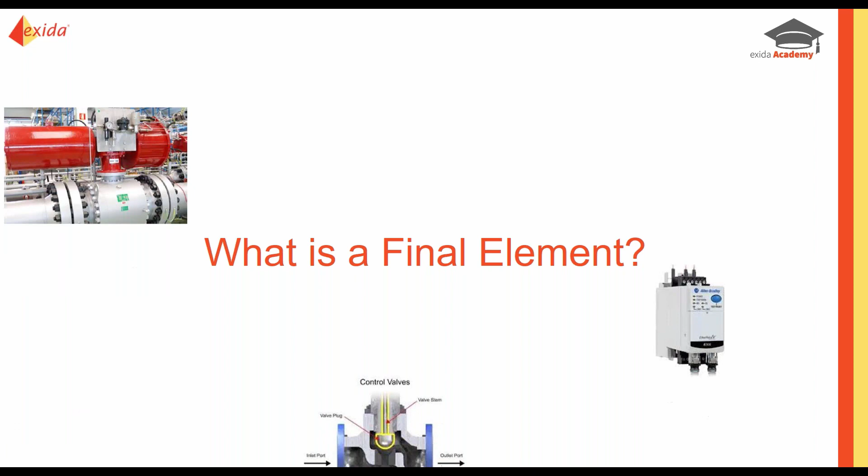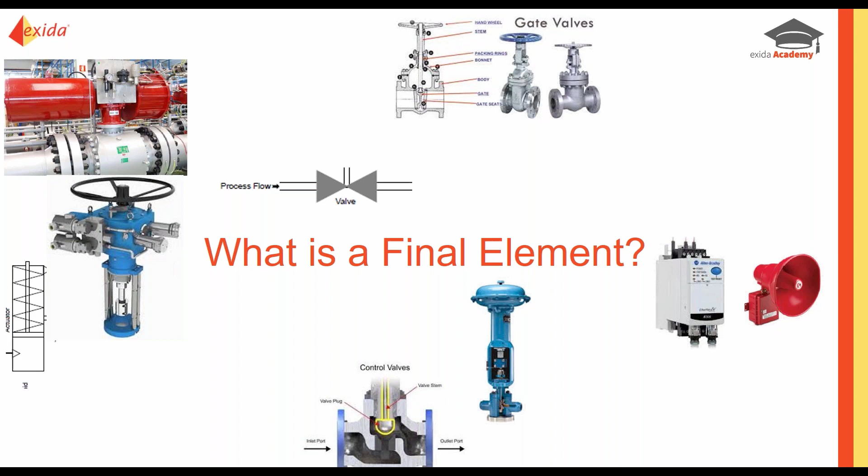Final elements can be many, many different types of devices. The final elements that we're going to be concentrating on are devices that can be used in safety systems. These can include annunciation devices such as horns, flashing lights, or sirens, any sort of functions designed to alert somebody to have a consequence reduction. So somebody is alerted, the sirens are going off, the horns are going off, and you're going to reduce the consequences of an accident.

Some safety instrumented functions, or SIFs, which I'm going to be calling them throughout the presentation, can be simple, actually only comprising of one device.

You might have a relay, a motor contactor, or a solenoid valve, and you can use just that alone as your final element. Or you could have a more complex SIF, like a machine control application where the final element may be your motor controller, or a device as complex as a clutch or brake assembly, which requires removing kinetic energy for your SIF. So when I first thought about functional safety and final elements, I was just thinking of the valve alone, that last piece. But final elements encompass so much more than that.

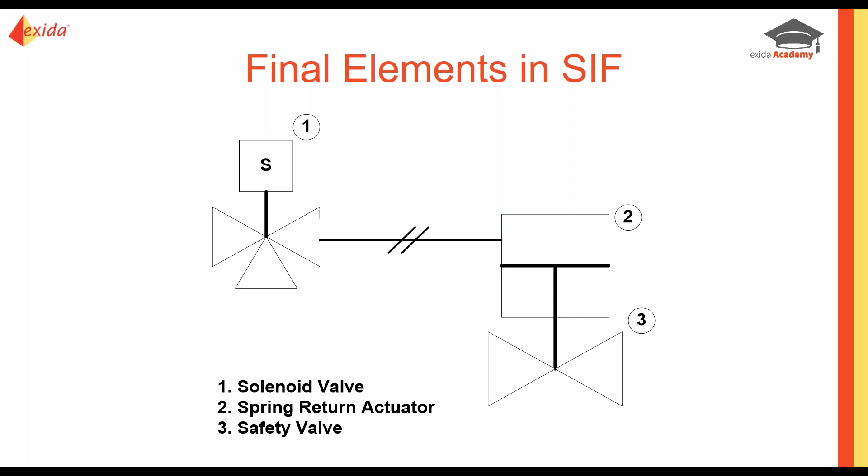So as you can see, our example of a SIF, just our solenoid actuator valve, is relatively simple, but let's take that idea and build upon it in this webinar.

The different devices that can go into the SIF depend on how complex you are. We're going to look at four main device categories, starting with your final element interface devices. Three of the main categories are a solenoid valve, a quick exhaust valve, or a volume booster. But there are other things like filters, flow controls, restrictors, silencers, regulators - all of those are also included in your final element interface device category.

Probably the most frequently employed device for controlling safety valves is a solenoid. Solenoid valves are available with various porting configurations. You can have a very simple poppet design, a 3-way solenoid, to a 5-way and beyond. So even solenoid valves themselves vary in complexity.

A solenoid valve, in its simplest implementation, utilizes a change in an electrical signal to control the flow of the fluid or your process flow. Solenoid valves contain a coil which generates a magnetic field when energized, and that field acts on a magnetic core piece inside the solenoid, causing it to move. It can either cause an opening or a closing. In a direct acting configuration, the movement of the core will either completely open the fluid flow or close it.

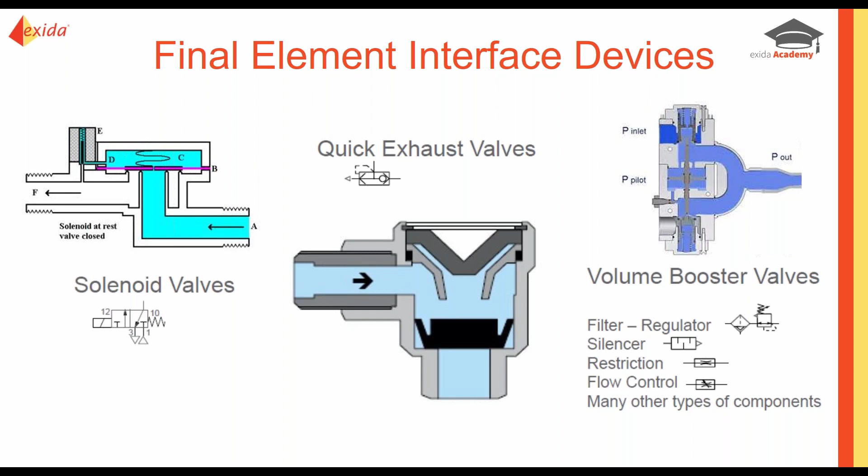The next category of devices that can be considered a final element are motor controllers or starters. A motor controller is a device or group of devices that serves to govern, in some predetermined manner, the performance of an electric motor. A motor controller might include a manual or automatic means for starting and stopping that motor.

This includes selecting forward or reverse rotation, regulating speed, regulating or limiting torque, and also protecting against any faults or overloads. There are three main types of starters: your direct on line, your star delta starter, and your auto transformer starter.

Many motor controllers can be manually, remotely, or automatically operated. They may include some means for starting or stopping the motor, which may include other functions or just that function alone. An electric motor controller can be classified by the type of motor it drives, such as alternating current or permanent magnet.

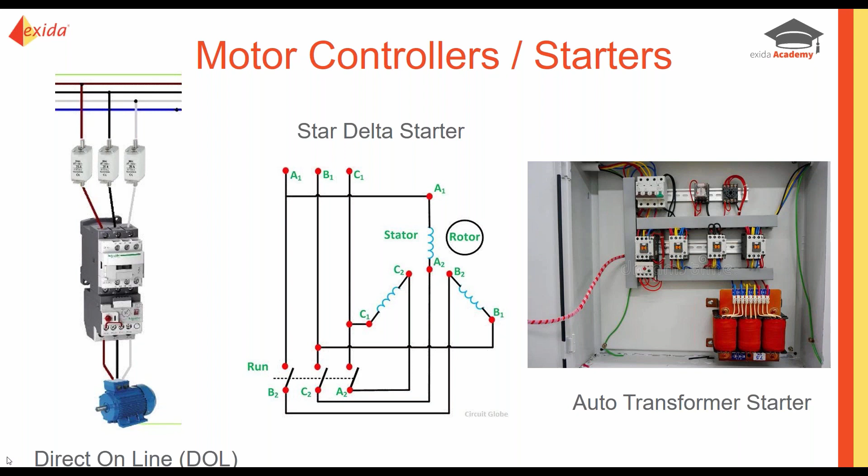The next type of device we're going to look at is an actuator. If you think of it in the simplest terms possible, an actuator is a mover, and it's a component or device in your SIF that is responsible for moving and controlling your main or end piece of your final element, usually being a valve.

There are many different types of actuators. I've listed 5 of the more common types: your diaphragm, your piston, rack and pinion, your Scotch yoke, or your motor-driven actuators. And there's always going to be subclasses of these actuators, such as spring return or dual acting.

But they will be classified on their main action, such as your rack and pinion will have more gears, more teeth, where your Scotch yoke is going to be that same linear to rotary action, but by means of a lever arrangement instead.

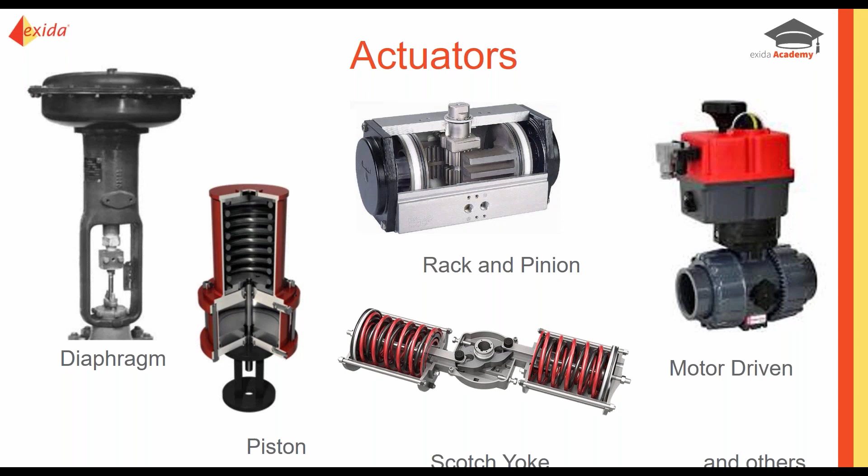One thing to take into consideration when you are considering your actuator, you need to also consider your power source. Is it electric? Is it air? What if that power source is lost? Can your valve still close or open if it needs to? Do you need to have a backup power source?

The final category of final elements that we're going to discuss today are valves. And once again, just like actuators, there's many different types of valves. I listed a couple of the more common. You might have heard of a ball valve or a gate valve, a plug or a butterfly or a globe, but there's many different types of valves out there.

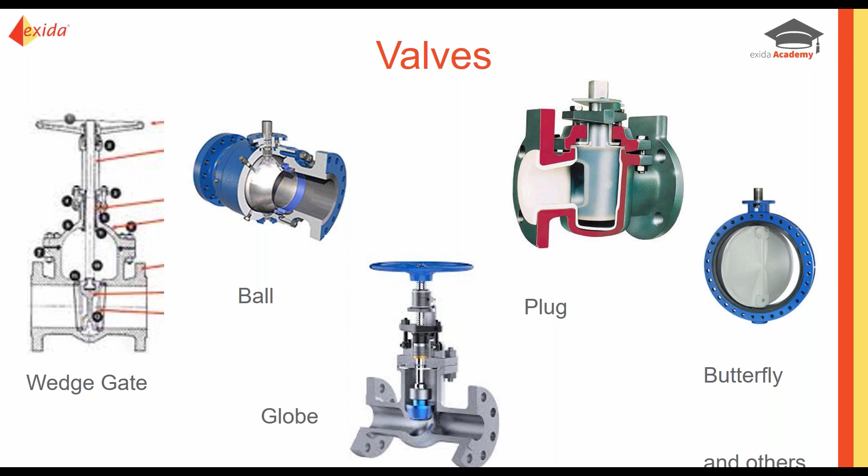Both of these can be used in safety systems. Both of these can be used in the same applications. However, globe valves are better for regulating flow, whereas ball valves would be better for an on-off control without the pressure drop.

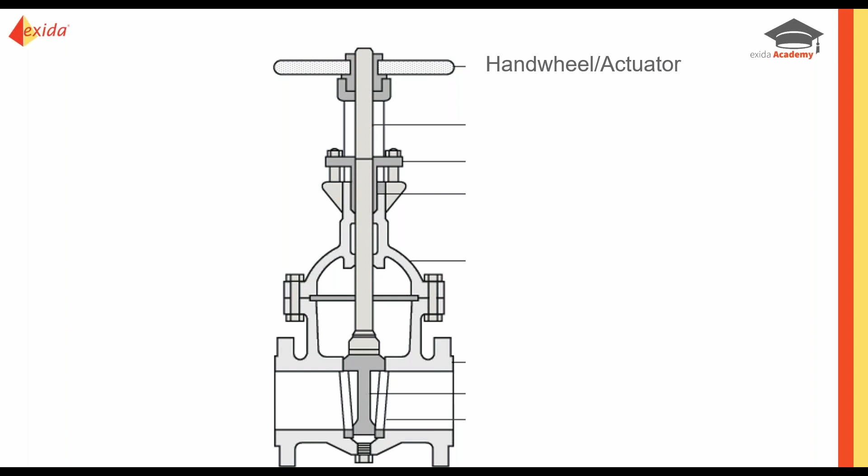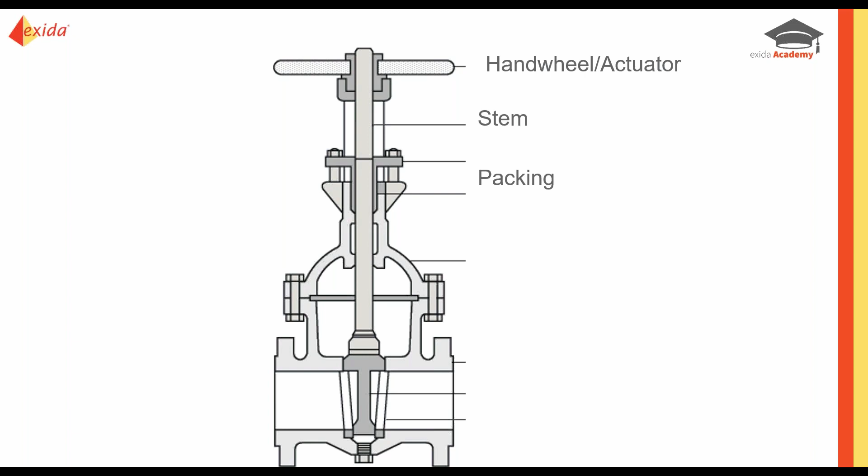When you look at a valve, there are a couple main portions that are going to be the same no matter what, or similar no matter what valve you look at. At the top, you're going to either have a hand wheel or an actuator connected to the stem. Around the stem will be your packing, holding that stem in tightly into place. Then you have your bonnet, which is going to protect the stem and also hold the valve body together.

Then you have the main valve body itself. This can be one piece, it can be multiple pieces. The valve bodies can be very large, they can be very small, but it's going to encompass the main portion, whether that's the ball, the slab, the plug, the obturator, whatever that is going to stop the process flow.

And then around the ball or the plug or the slab, you're going to have some sort of ring or seal or seat. This could be an O-ring, this could be a trunnion, however it is sealed, but you're going to want to make sure when the process flow is stopped, it's going to have a seal around it.

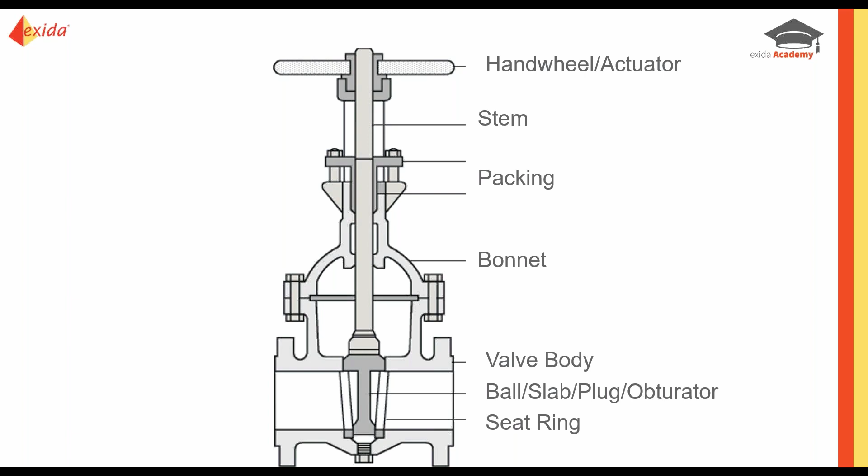When talking about final elements, after you discuss what they are, the next thing that usually comes up are the issues that are associated with final elements. Why is that? Well, when you talk about your SIF, you have your sensor, your logic solver, and your final element. We did a study of over 80,000 SIF designs, and it showed that the final elements contributed about 70% of the demand, the PFD average.

They took up most of the PFD average of the SIF. What is the PFD average? Well, that is the probability of a failure if there is a demand on your safety system at that time. So as you can see, 70%, that's a large portion. So it is very important that you choose your right pieces of equipment for final elements, that you're doing the right calculations, and you know what you're getting yourself into when it comes to final elements.

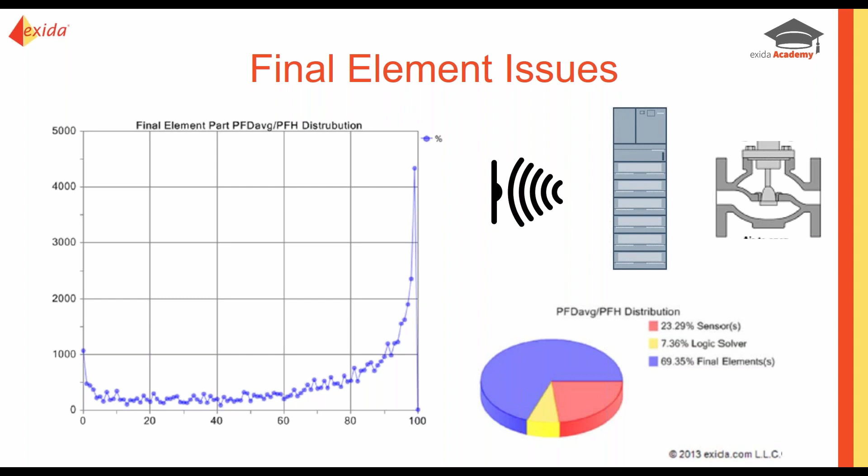So how do you choose your final elements? Well, I like to say, start off with your application requirements. That's going to be anything that makes your SIF perform its job correctly. Do you have process flow going through a valve? Maybe that valve needs to close if there is a demand on the system. If that's the case, you will need a close-on trip capable valve and actuator.

What if you have a sprinkler system and it turns on by opening up a valve and releasing the water? Well, then you might need an open-on trip application valve and actuator. That's great, it opens, it closes. But does it need to do so quickly? How quickly? What about leaking - if you close, can anything get through, and is it okay if a little gets through, or is this extremely toxic material you don't want getting through? You might then need to look at a tight shutoff application.

Next, let's talk about what's going through your SIF. What is your process? Is it nice, clean, sparkly water that's nice to your equipment and treats it correctly? Or is it a toxic sludge chemical that's corroding your metal and has rocks and other abrasive material that can damage your device?

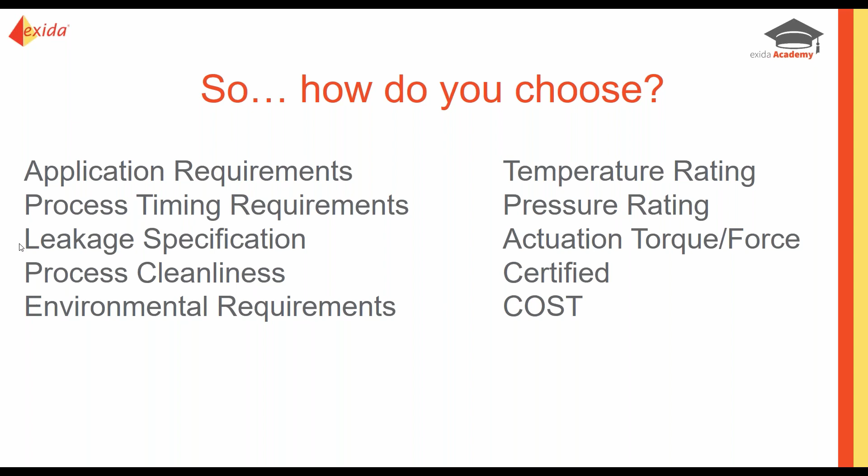One of those items we talked about was certified devices. One of the items that can really help drive the success of your SIF and drive your device selection is product safety integrity. As with all products used in safety applications, safety integrity evaluation and justification can be accomplished one of two ways. You can either buy certified products that are already third-party certified and just use them in your system, or you can do prior use justification and do the documentation and justification yourself. It's a process, but it can be done.

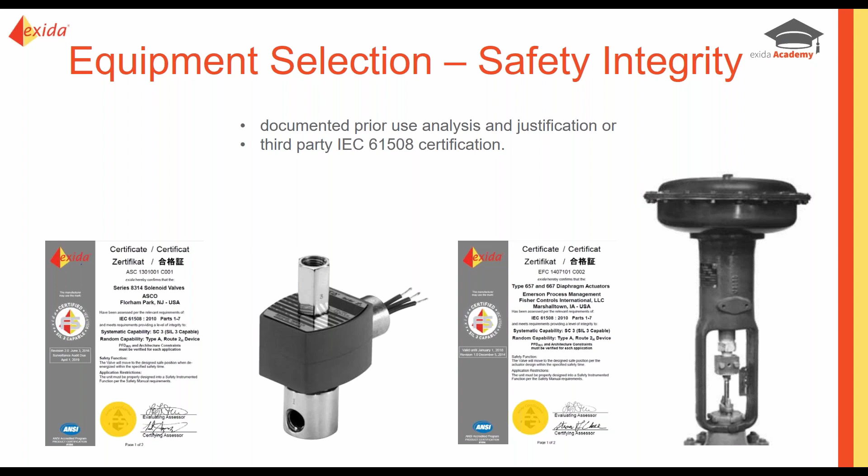On the back of the certificates we just talked about is a very important piece of information, and that piece of information is failure rates. Those failure rates predict the probability of failure if there is a demand on the safety system. That probabilistic performance analysis is a fundamental concept that allows designs to match risk. It allows designs to really be optimized - you can look at cost versus operating costs, and it allows designs to maximize safety without serious weak links.

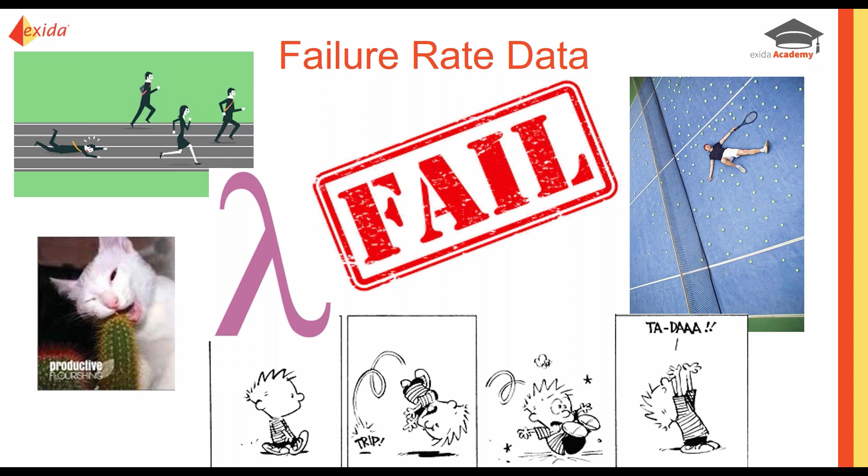Well, that's great and all, but where does this information come from? Well, there's all sorts of jokes out there that no one knows where this information comes from, or jokes that reliability engineers are just a bunch of academics or theoretical people, not real world people. And they kind of have a point. When somebody's given certificates for a solenoid - the same type of solenoid - and one says 400 and the other one says 0.0, it doesn't make sense. So we get asked that all the time.

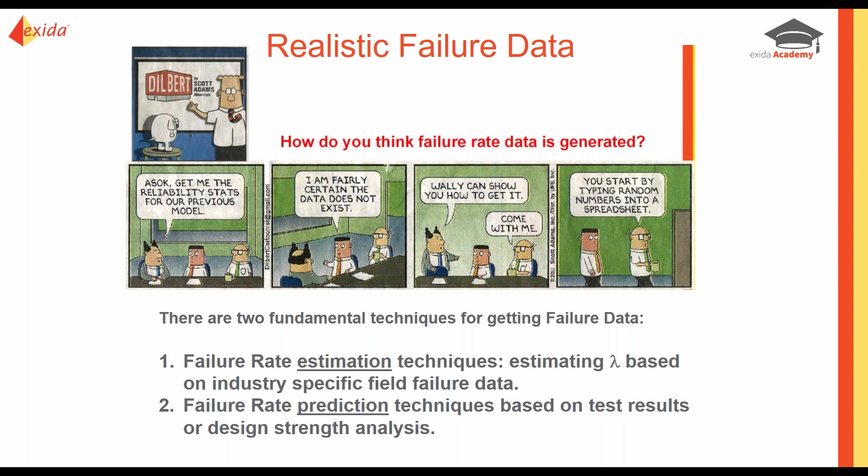Why is that? Well, it's because there are two main different fundamental techniques for getting failure rate data: estimation technique and prediction technique. We're going to take a brief look at each of these techniques of failure rate data.

So in predicting failure rates, there are two types of ways: you have your B10 data point and your FMEDA. Your B10 data is also known as cycle testing. You might be familiar with this if you're in machinery applications or constant dynamic operation. An FMEDA is a predictive analysis done that looks at component database and strength and weakness analysis, and that's for low demand or static applications.

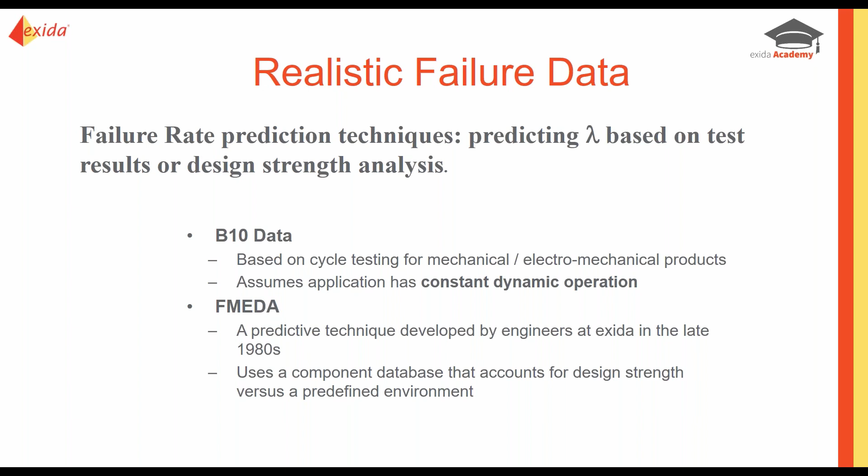So the B10 data, or cycle test failure data, is a technique really used to determine the end of life for mechanical or electromechanical devices. It is a method for predicting failure rates, and if you're familiar with machinery or ISO 13849, you might be familiar with this. The main point of cycle testing or B10 data is that it is assumed all failures are due to premature wear out and that no other failures exist.

So it only means wear out. There is no corrosion, there's no leaking, there's no stiction, there's no cold welding—all of these things that can happen.

If you're going to do a cycle test, you need a set of products greater than 20 to make sense statistically, and you run your test until 10% of the units under testing have failed.

The number of cycles is then called your B10 point. The B10 number of cycles is converted to a time period by knowing the cycles per hour in any particular application.

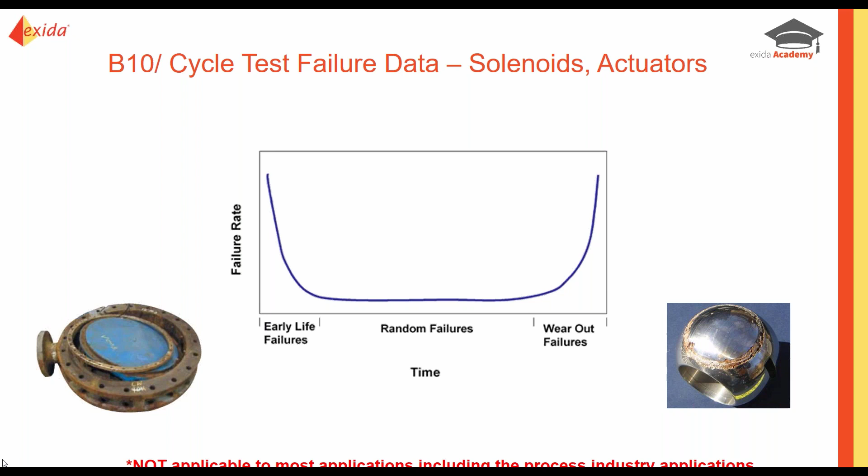The other predictive analysis technique is the FMEDA, or failure mode effect and diagnostic analysis. I might slip up and call it FMEA, but it's a detailed analysis of every failure mode of every component of a given design. This is going to be particular for the manufacturer, the model, the mode, everything.

If it's a close-on-trip application or an open-on-trip application, if it is cabinet mounted or subsea, or if it has clean fluid or toxic fluid going through, all of that is taken into consideration in an FMEDA.

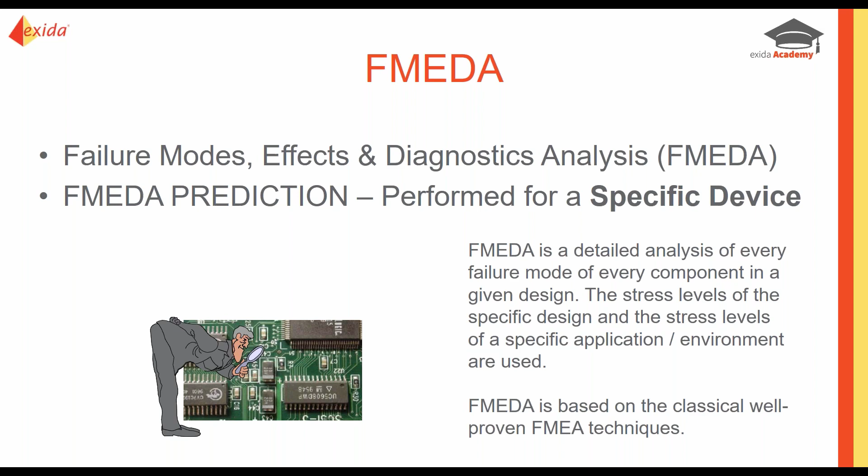One red flag with an FMEDA is the FMEDA database itself. When you have a database that is going to be shaping your results, you want to make sure it is calibrated, that it has been validated, that it is up to date, the most current, and an apples-to-apples comparison. What I'm talking about—if you are a subsea application, do not

use an FMEDA database for a cabinet mounted device, and vice versa. So when you are getting an FMEDA done, make sure you know where the database comes from—where those numbers came from is very important.

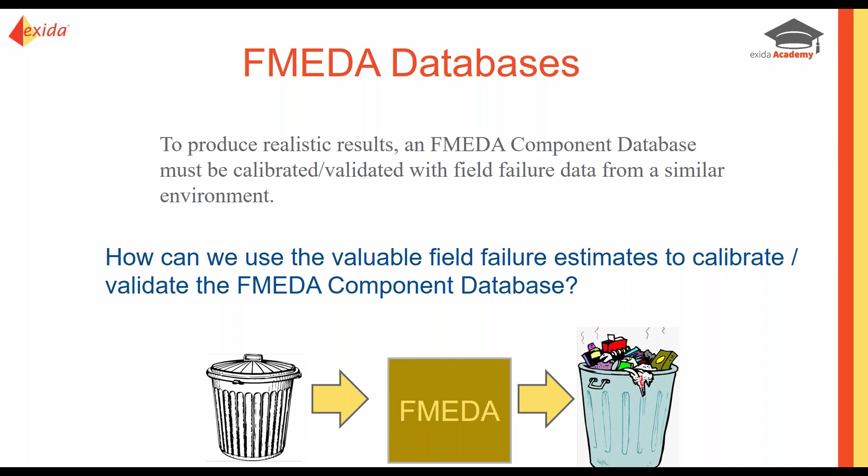The other way of getting data is estimation. Estimation kind of happens after the fact—you're estimating failure rates based on failure data already out there. There are three main ways of estimating failure rate data: manufacturer field return data studies, industry databases, and end user field failure data studies.

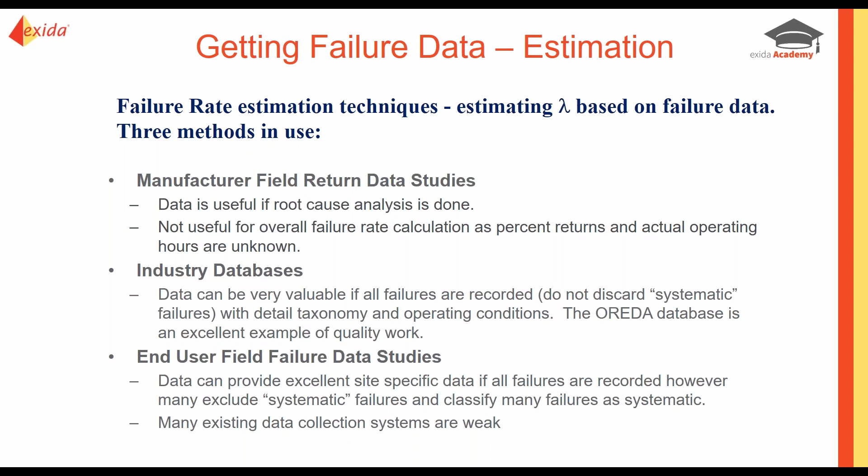Just like the B10 and the FMEDA, these estimation techniques have positives and negatives. Once again, always make sure you are comparing apples to apples applications and environments, no matter what source of failure rate data you are getting.

We took a look at failure rates just for solenoids—this is just an example. We have this for valves, actuators, multiple different types of valves and actuators. This is just our solenoid, but we wanted to see what the different estimation and predicting techniques compared to each other looked like. And as you can see, the estimation and prediction techniques all kind of came around the same area.

However, all but the B10 or the cycle test data point. And this is where that confusion of data, or confusion of failure rates, comes into play.

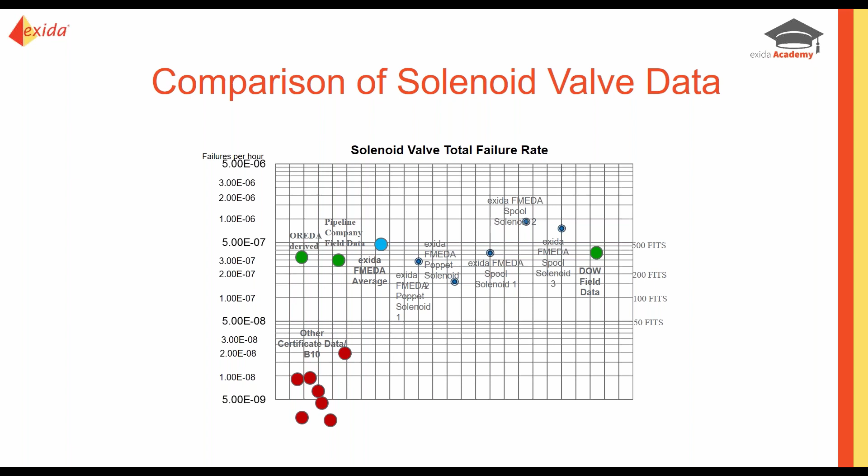When people ask me, how do I know what data to trust? I say, well, go to this website—it helps you out so much—silsafedata.com.

You can look up your generic type of device, say a motor-driven actuator or a triple offset butterfly valve, and you can find what I call a sanity check. It's a lower bound and an upper bound of where you should see failure rates. Most of the time it's a pretty large bound, but that can be expected.

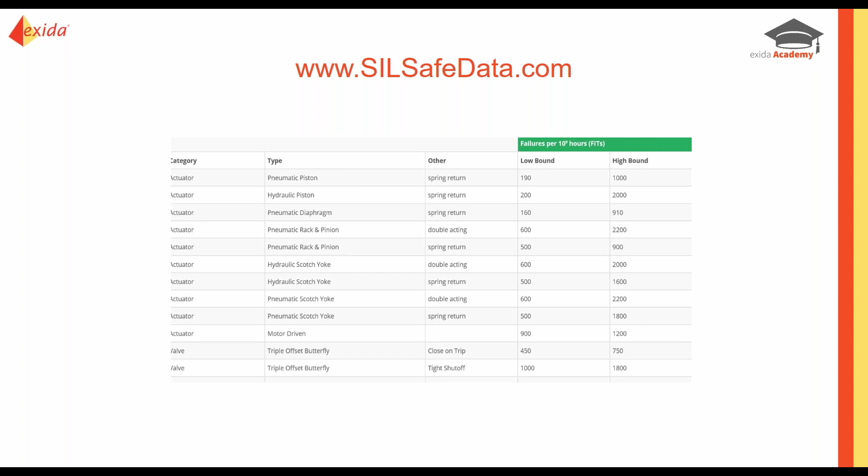There can be a lot of different levels of complexity in different designs, but this will at least let you know if your numbers are about right or not.

And just to put the graph on from before with the SILSafe Data limit for this type of device, as you can see, that B10, those cycle test data points, once again fall below that SILSafe Data. That's when I would go back to wherever I got this data source and question it.

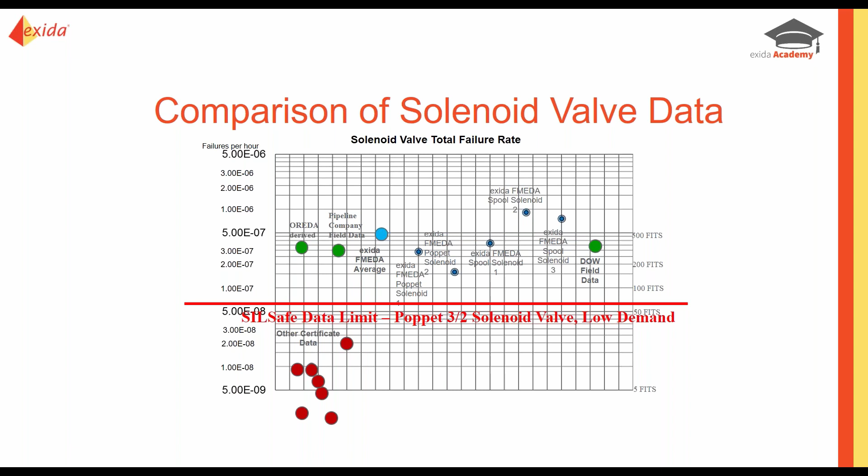What's the big deal? Who cares if we use correct failure rates or not? Well, let's say your data is just a little optimistic. What harm can that do, right?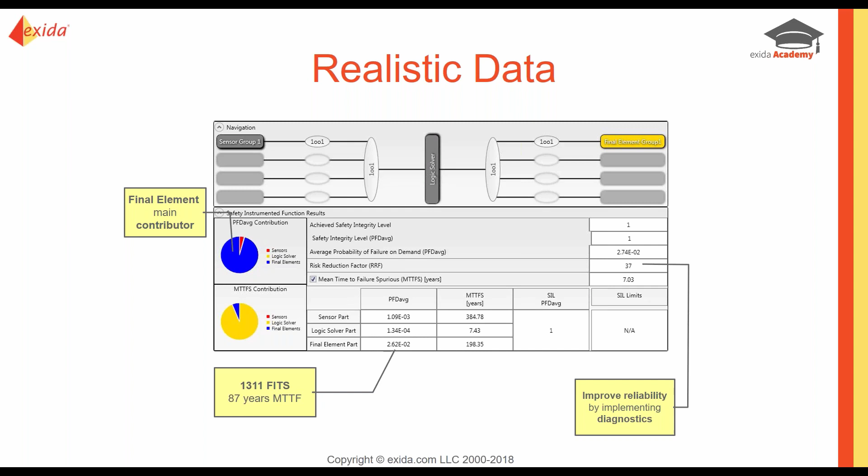However, there's things that you can do to improve the reliability. You can implement diagnostics, you can change your architecture, maybe be a 1 out of 2 system. So you can still be that SIL 2 if you need to be. So don't give up hope. But the main point is, even if you just think your data is a little optimistic, it could be unsafe.